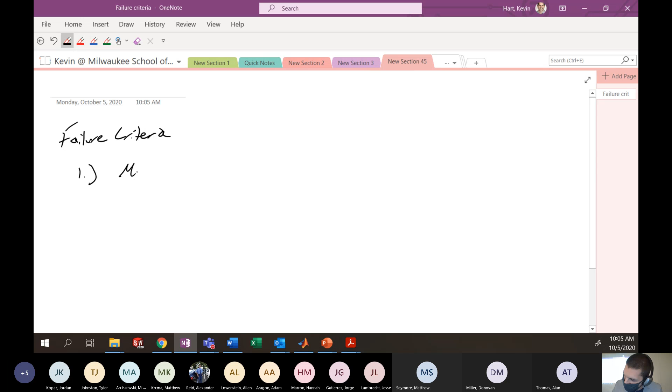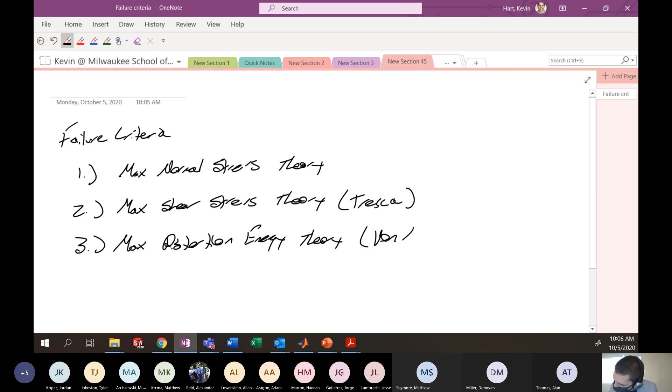The ones that I will test you on are: max normal stress theory, max shear stress theory (which is sometimes called the Tresca), and maximum distortion energy theory (which is sometimes called von Mises failure criteria). These are the big ones you really need to walk away from this class knowing in and out, because you're going to use those in your design of machine components classes.

Numbers 2 and 3 are most important, but also helpful to know number 1. But the interesting thing about all three of these particular theories we've talked about is that they all sort of rely on the fact that the material will fail the same in compression as it does in tension, which is not always the case.

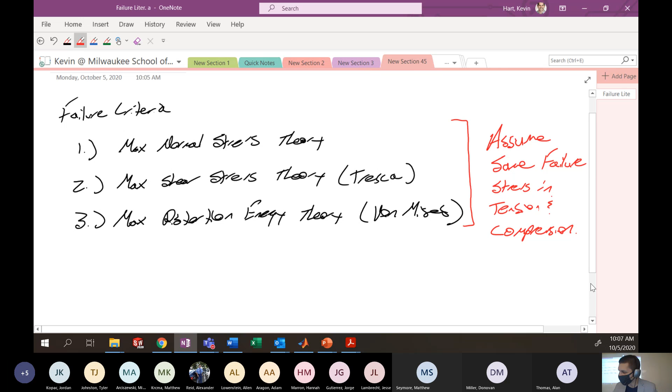So these assume same failure stress in tension and compression, and that's not always the case with real materials. You know this if you've ever worked with concrete - it's amazing in compression, horrible in tension. Horrible, I say.

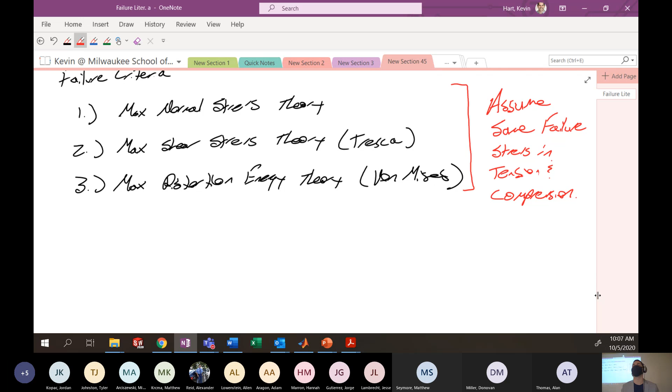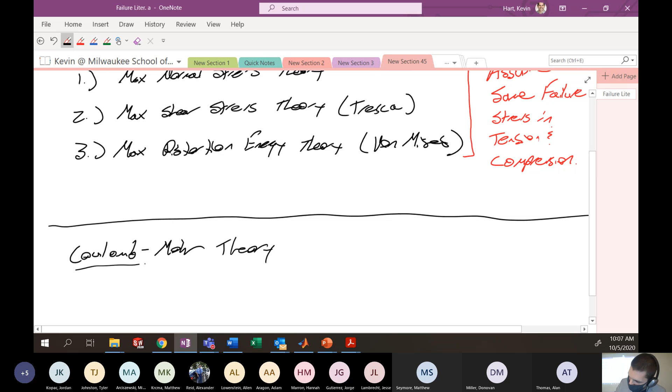I want to touch quickly on what is probably the most commonly used method for evaluating failure stresses of materials that have dissimilar failures in tension and compression. The main theory used to tackle this is called the Coulomb-Mohr theory, and this is generally for brittle materials that don't have the same failure stress in tension and compression.

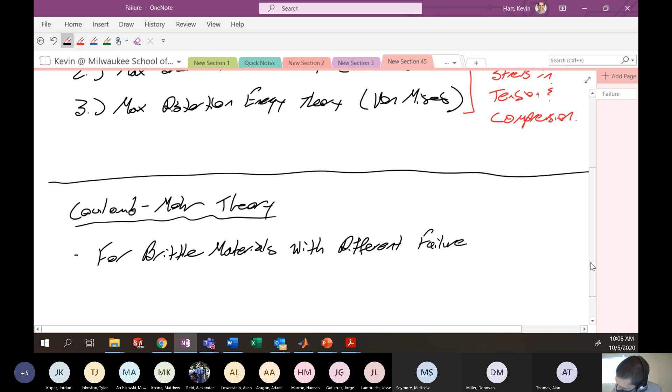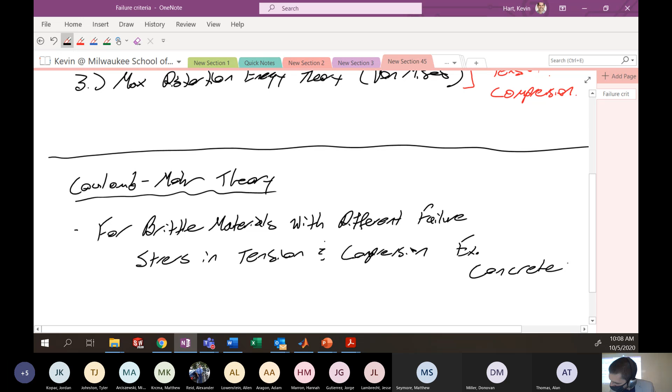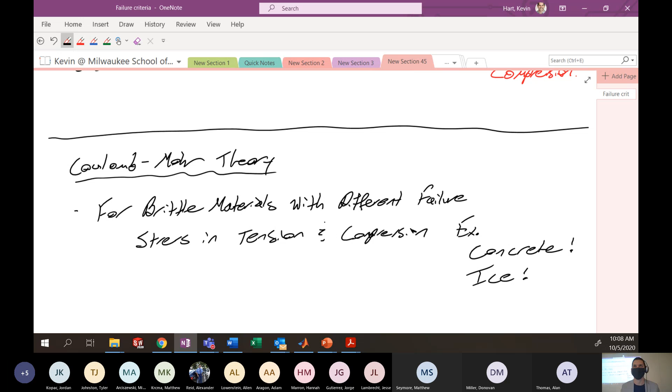One example might be concrete, or ice is another one - strangely. Concrete! Ice! Maybe it's because winter's coming and I'm getting nervous about ice. I don't know.

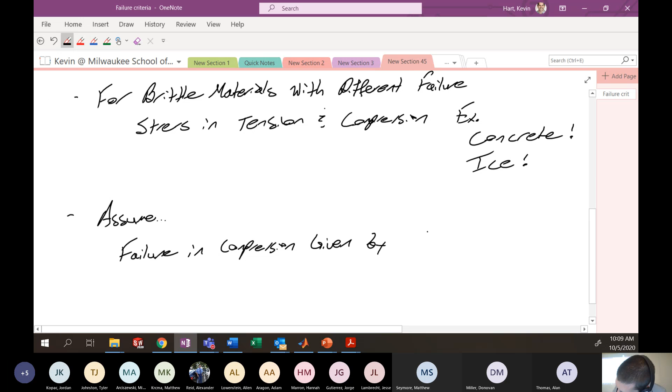All right, so let's assume that failure in compression is given by sigma naught with a superscript c, and failure in tension is given by sigma naught with a superscript little t, as opposed to Mr. T - I pity the fool.

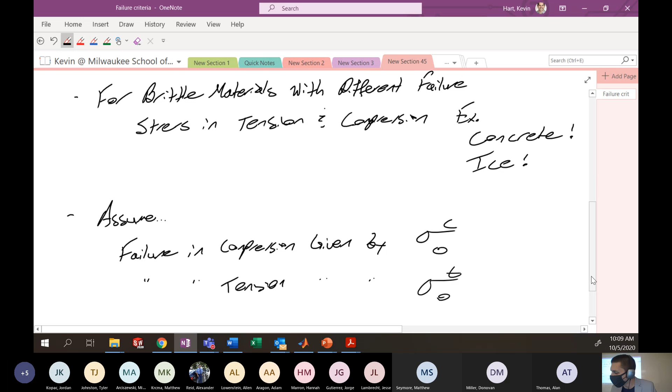All right, here's the failure criteria. It's pretty simple when you think about it. It's maybe a combination of the contribution that your largest principal stress makes towards tension, plus the contribution that your smallest principal stress makes towards compression, both potentially adding up to give you some failure criteria. So here's the equation, and I'll talk through it.

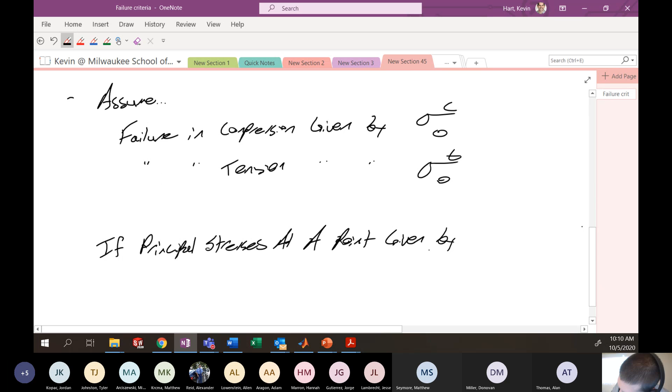We'll say if principal stresses at a point are given by the following: sigma 1 greater than sigma 2 greater than sigma 3. So we're ordering them in the traditional way - 1 is greater than 2 is greater than 3.

Then Coulomb-Mohr is: the first principal stress normalized by the failure of that particular material in tension, minus the third principal stress divided by the failure of that particular material in compression. If this together is greater than or equal to 1, you fail.

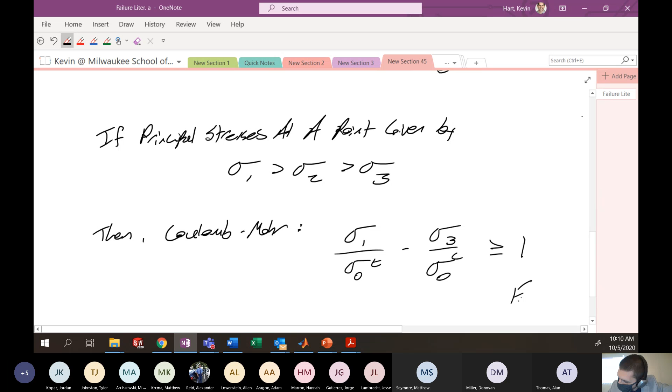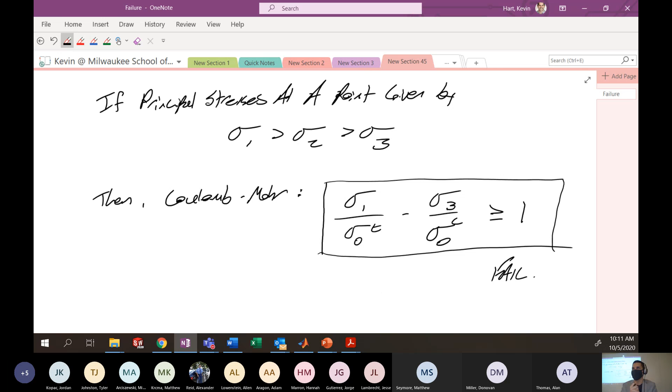Okay, this has flavors of like maximum normal stress theory in sort of a way. Actually, I'll say it's more similar to max shear stress theory.

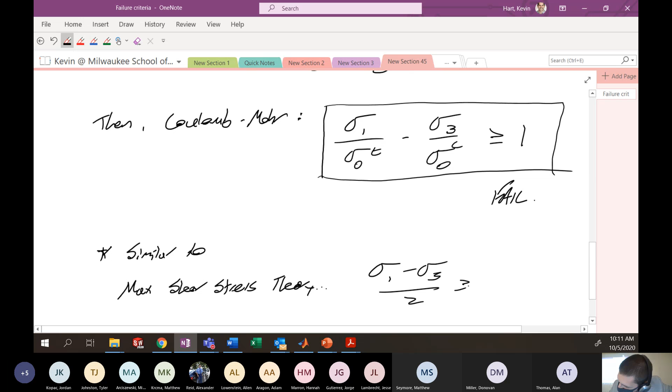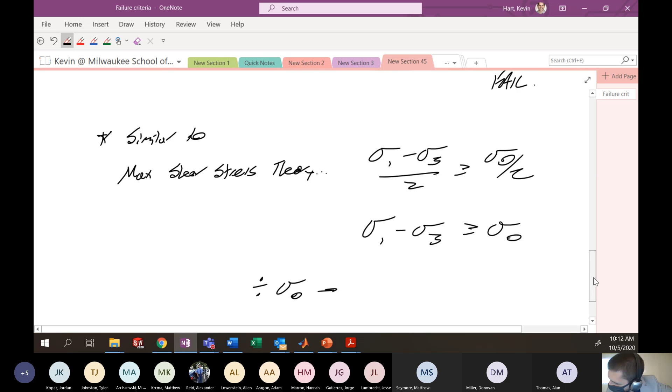Which, if you remember, was sigma 1 minus sigma 3, divided by 2, greater than or equal to sigma naught over 2, you would fail. That's our max shear stress, or if you simplify, sigma 1 minus sigma 3 greater than or equal to sigma naught. This was just our general max shear stress theory. If you rearrange this equation by dividing both sides by sigma naught, you'd end up with sigma 1 minus sigma 3 divided by sigma naught greater than or equal to 1. So think of this as the difference in these principal stresses, normalized by the yielding stress. If that's greater than or equal to 1, you would fail.

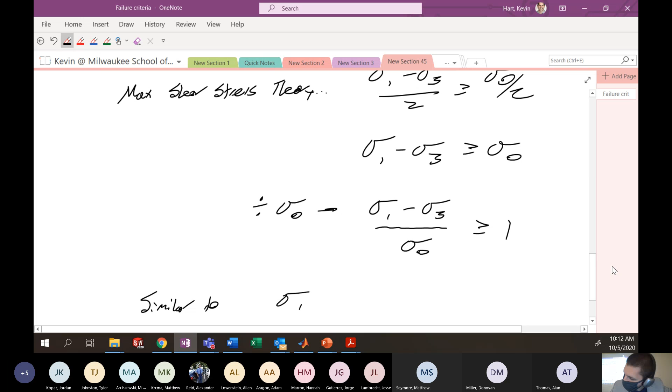So we have flavors of that with our Coulomb theory, except we don't normalize this difference by one value. We normalize each of those individual components by the yield stresses in compression or tension, to see what happens. This is similar to what we just saw: sigma 1 over sigma naught tension, minus sigma 3 divided by sigma naught compression, greater than or equal to 1. It's a very similar concept. If these values were the same, it would simplify to your max shear stress theory. Hopefully we see that.

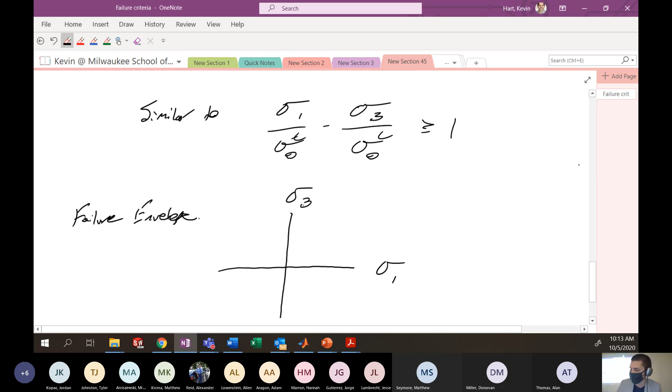Now, how does this actually look in your failure envelope? Well, if we did sigma 1, sigma 3 here instead of sigma 1, sigma 2, which we normally do, you might have a situation. Let me bring this down here.

Here is your maximum that you can handle in tension in both situations. So here's sigma naught T, here's sigma naught T. But in compression, you can handle maybe twice as much, let's just say. So here, negative sigma naught in compression, negative sigma naught in compression. So you would have something that looked like this.

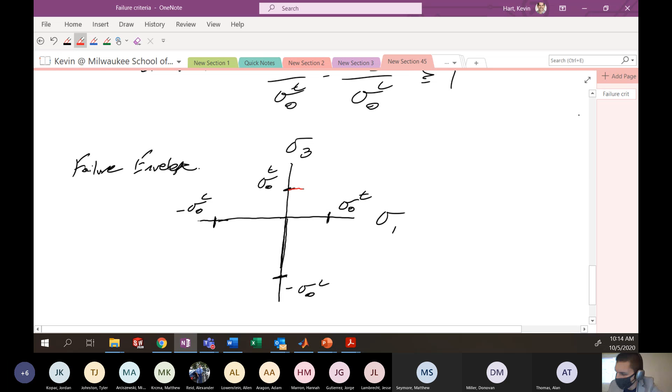Okay, and this is your failure envelope for Coulomb. Oh, that's terrible, gosh, I did not pass kindergarten, I cannot stay in the lines. So even though they gave me a PhD, they held me back because I didn't pass kindergarten. There you go, that's better.

So we can see here generally that if the amount of stress this material can hold in compression is higher than the amount it can hold in tension, we have a much bigger failure envelope in a fully compressive state than in a fully tensile state. When you think about concrete applications, this is usually the case, and in areas where you need additional tensile support for concrete, they use rebar. That's all I'm going to say about the Coulomb theory. I'm not going to test you on it, and I'm not going to have homework problems on it. I just want you to be aware of this failure theory that might apply if you have materials with dissimilar failures in tension and compression.

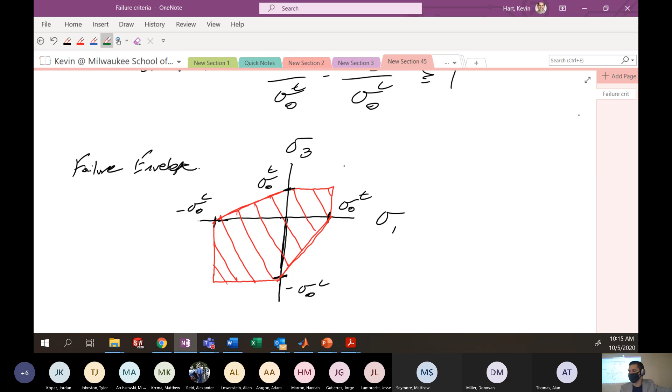So that'll conclude the failure stress notes, and we'll now move on to the next topic, which is buckling.

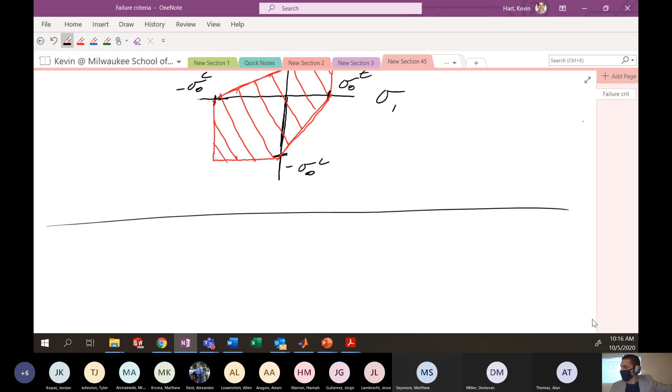And I'll survey the room since people are in front of me here. How many days did you talk about buckling in 2004? You can show me on your hand. One to two, I'm getting the scissors over here. Do we have zero? Two? All right, so at least you guys have seen it a little bit. Okay, good, well that's nice. I've had some 3005 classes where it's been zero, we did not talk about it, and that just makes me a little scared. But okay, it is what it is.

So new topic, buckling. And I think this is my favorite topic for the course, personally. I think it's really quite interesting, and if people don't consider buckling for failure, then you're going to be a bad engineer. Long, slender columns under load can fail prematurely before you might predict with the failure theories we just talked about, and that's because of this instability in long, slender columns.

And I brought this ruler here because it's the most classic example. You've seen this before, you got this ruler, and if you load it on the ends, it will buckle. This material itself does not fail, it's not yielded, it's not fractured, it's not broken in any way. It's just buckling, and this is just an instability in materials that exist in the world. It's just part of the physical world that we live in.

And so if you're not considering buckling in a potential situation where it could occur, like if you have long, slender columns that are holding up a building, for instance, and you've got a column that looks something like that holding it up, if you're not considering it, your building's going to be a little wobbly, I'd say. So not so good. So we need to consider this.

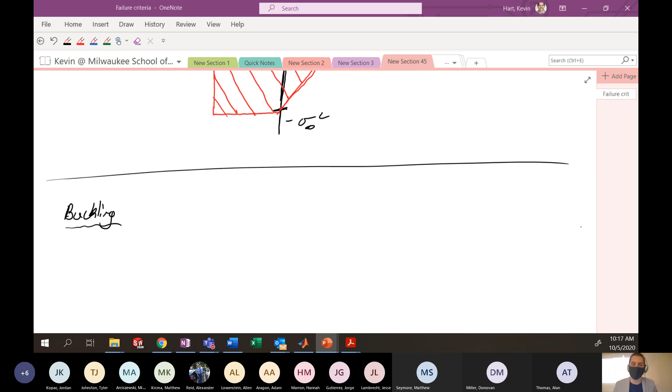So let me just write some things here as motivation. Long slender columns, under axial loading, can buckle in an unstable manner.

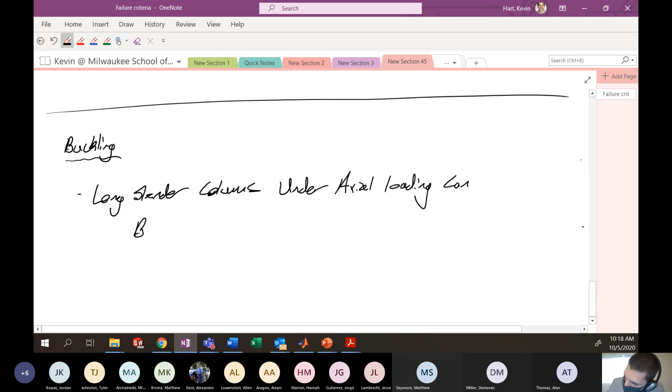The example I just used was like a long slender ruler. These can sometimes occur at loads that are significantly lower than that which might cause yield or otherwise cause the material to fail.

Let's say that would normally cause failure by yielding. Let's just stick to yield metals for now. Again, the ruler is an example. It can sometimes be way less - we're talking 5% of what you might predict with maximum normal stress theory or something like that. Way less.

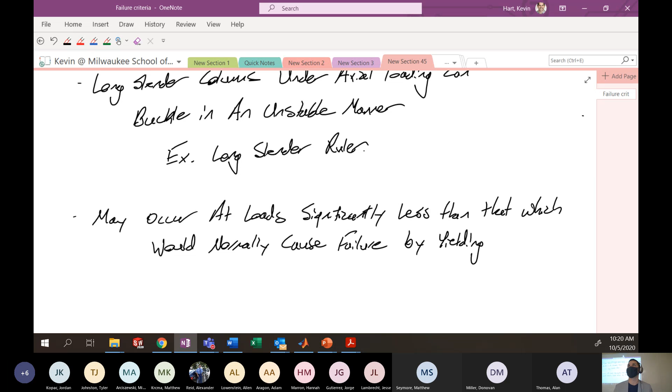You probably saw this in your 2004 class as the following equation, and I'm going to review that quickly.

Did we all see this, or something along these lines, in 2004? Pi squared EI over L prime squared, or L effective squared, or something along those lines? I'm seeing some head nods and some deer in the headlights - okay, so maybe 50-50.

So what we're going to do is actually go over how this equation came to be. Maybe you derived it in 2004, maybe you didn't. We're going to talk about it in pretty gory detail here because the derivation becomes important.

It becomes important to know because this particular equation is for centrally loaded columns. What I mean by that is a load directly in the center of the axis of the beam. You could have a situation where your load is somewhat off axis, and we have to be able to know how to deal with that by modifying the equation you see here.

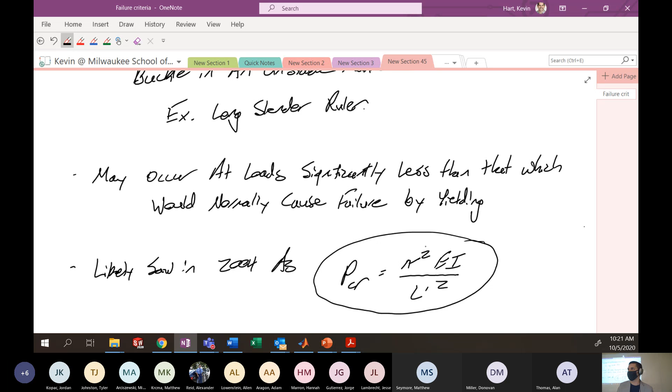To do that, we really have to go through the full derivation so you understand where this comes from, and how we might modify it if you have some load that contributes bending as well as axial loading to that cross section. So let's do that quickly.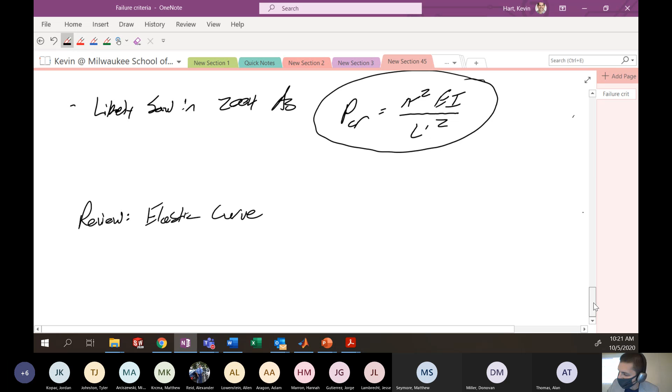The first thing I want to talk about is the elastic curve. In the elastic curve, there's a variety of definitions, but it's typically a function that represents the neutral axis of some bar.

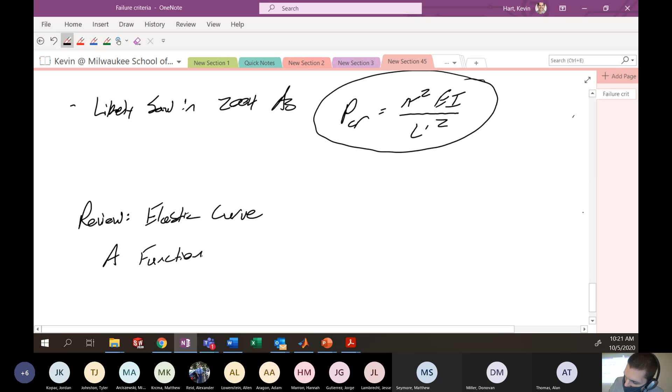Question? Is that pi squared in the equation? Yes, Alan, it's a pi squared. Pi squared EI over L prime squared.

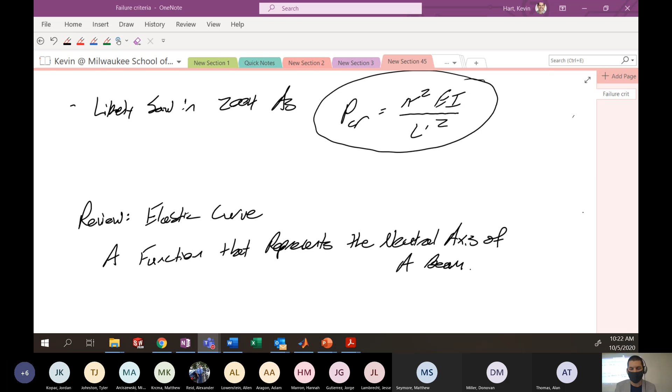I will continue. The idea you want to have in your head, which you've probably seen before, is if you have some beam and it's being deflected - I'll do the best I can to draw some beam that's being bent. Something like this. Here's your beam. You've got some pin over here, some roller over here, and this is being subject to some force in the middle, F.

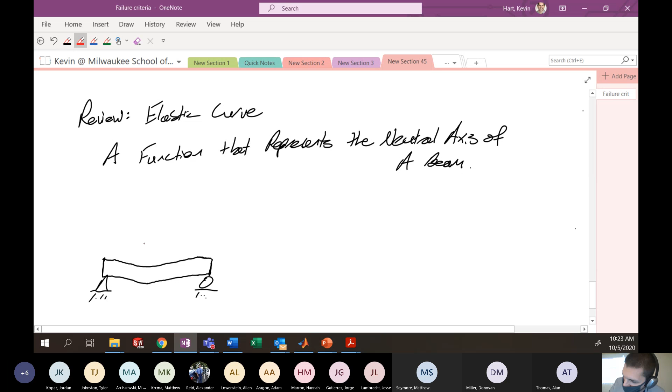You might represent this bar using just a general function, which we call the elastic curve. You could put a coordinate system on this, maybe emanating from the left-hand side. Call this the X coordinate system. This is typically like Y, or what you might see as V of X, when you're talking about the deflection, or the function that is the cross-section in the neutral axis of this beam.

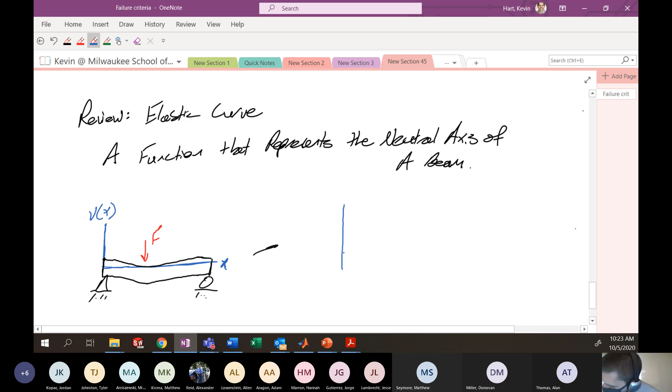Then you might see this represented with this elastic curve idea as, okay, here's my support, my pin and my roller. I might represent this just using a simple line that looks something like this. This is meant to represent the neutral axis of this particular bar - that's the idea of the elastic curve. We typically say this has a function: if this is x, the length along the axis of the beam, then we would call this v of x, or the deflection of the neutral axis of the beam.

Deflection is the term.

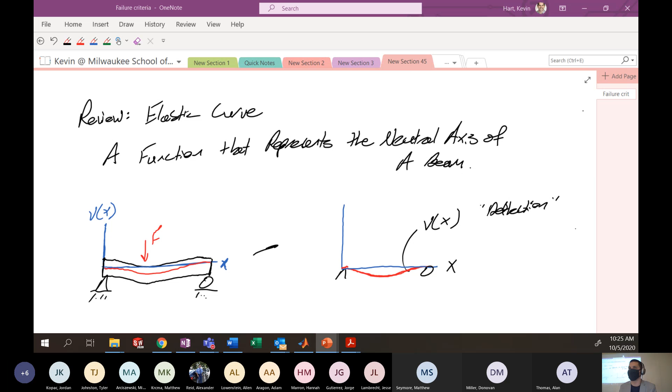Writing the elastic curve allows you to do a lot of interesting things, like look at what is the derivative of this function, what is the second derivative of that function, and so on, and how those particular derivatives might be related to the bending moment in the cross-section at any location, or the transverse load in the cross-section at any particular location. So the point is this elastic curve allows us to learn a lot about the particular cross-section and how it's related to the internal moments. Hopefully you went through all of that in 2004. I don't have a ton of time to do it right now, but this allows us some very useful relationships.

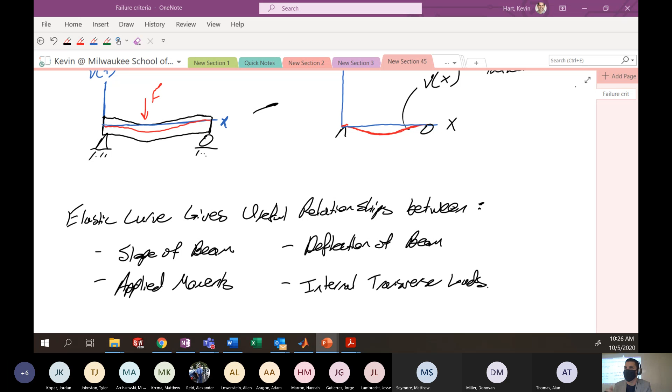Relationships between the slope of the beam, applied moments, deflection of beam, and internal transverse loads. Those relationships, which I hope you've sort of seen before, all stem from what is known as the moment curvature equation, or the governing differential equation for a beam in bending. We talk about this in words, but in math language, which we're all kind of familiar with, this is what we call the governing differential equation of beam bending. So it's a simplified version.

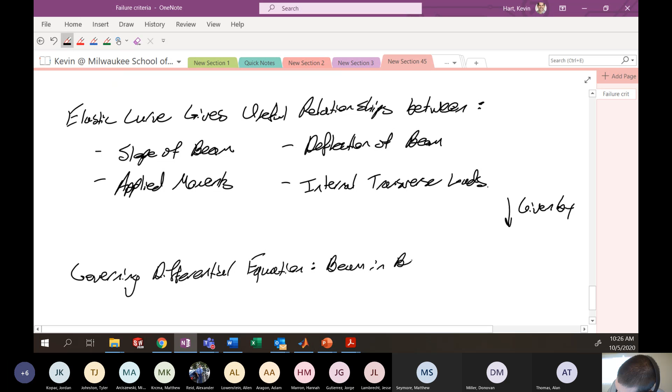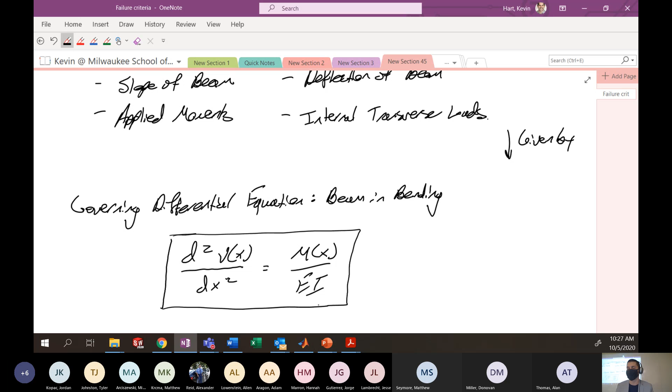And boy, I hope you guys have seen this before: D squared Vx dx squared equals Mx over EI. If this is not familiar to you, in the lecture notes, slides 2 through 5 of the buckling section, there's a full derivation of this particular equation. Hopefully this is not the first time you've seen this. You can play with this and take derivatives and integrals and look at various things.

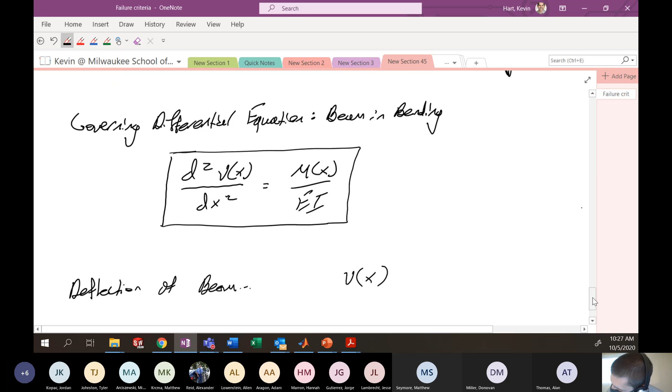We'll say that the deflection of the beam is given by this function v of x. The first derivative gives you the slope, sometimes called theta x. The second derivative gives you this moment relationship: EI times d squared Vx dx squared is equal to the moment, the internal moment inside of the beam.

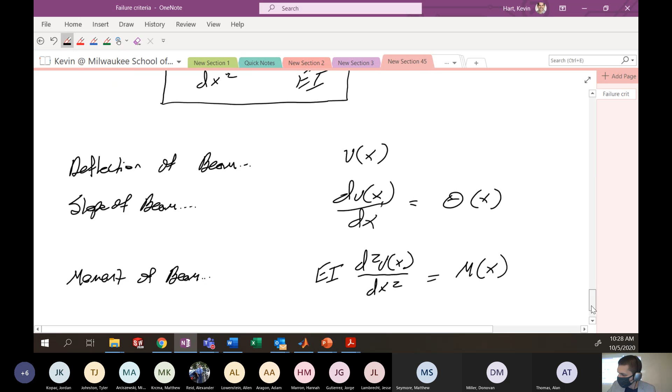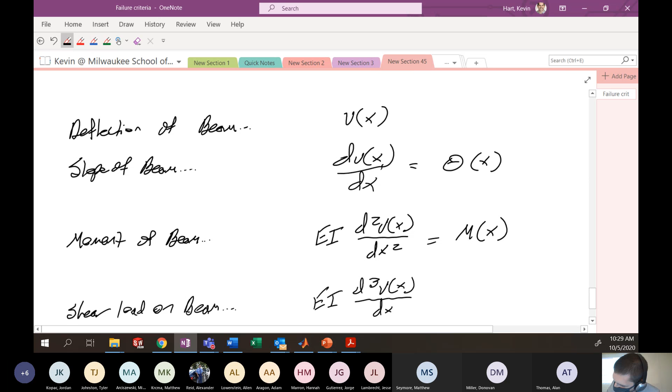Another derivative will give you the shear load on the beam. That is EI d cubed Vx dx cubed equals capital Vx. Are we all having nightmares? This is a capital V, this is a lowercase v. And then finally, just the load on the beam, the fourth derivative, sometimes called F. So this is marching our way through all the derivatives of that elastic curve given by V of x.

How are we doing? Can I get some nods in the classroom? You've sort of seen this before, or you haven't seen this at all before. Okay, get some nods. Okay, all right, good.

Hey, Dr. Hart. Yes, sir. Should the shear load on beam, the EI d cubed, should that be dx to the third on the bottom? Yes, thank you. There should be a cube here on the bottom, dx cubed.

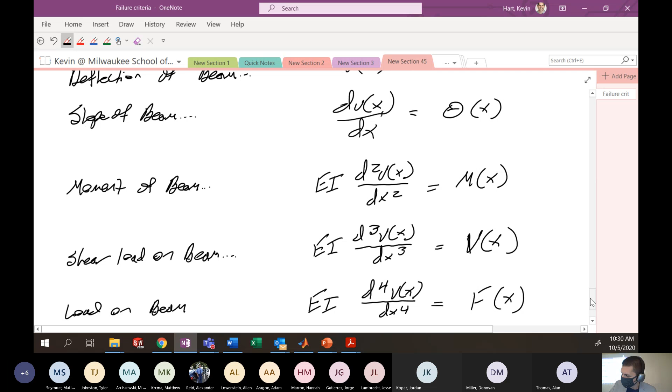Okay, so all these relationships hopefully you've seen before and have worked with before. We're going to utilize these in part to come up with that critical buckling load formula. So let's do that now. I want to first do this by drawing a picture. Here we're going to derive critical buckling load.

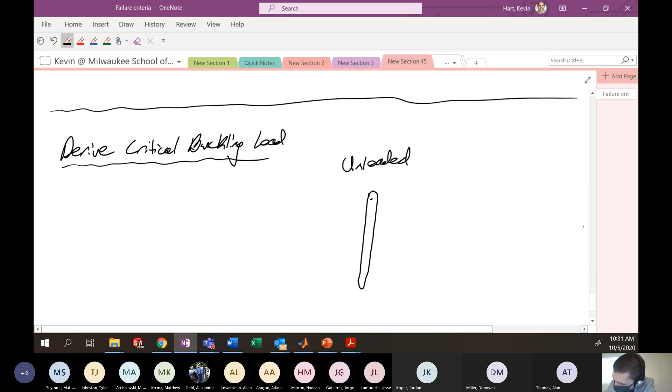I'm going to motivate this with a picture. The beam that we have here is similar to the beams you saw before, except we're doing this vertically instead of horizontally. Consider an unloaded beam, so it just looks like this. And we've got a pin-pin configuration, let's just go with that for now.

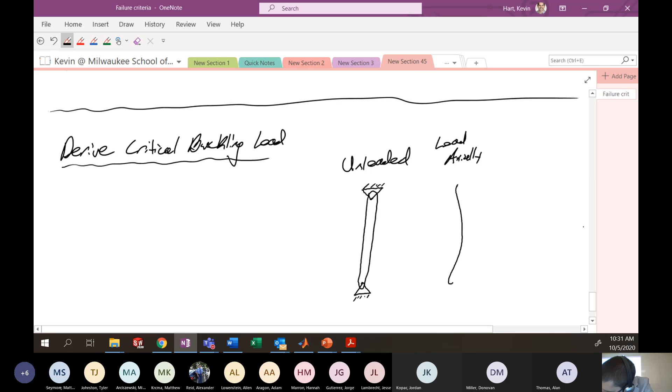Now we're going to load this axially. So you should see here now something that looks a bit like this, where we're providing some load on this guy. I don't have a ton of room to draw this, but here we have some load, let's call it capital P.

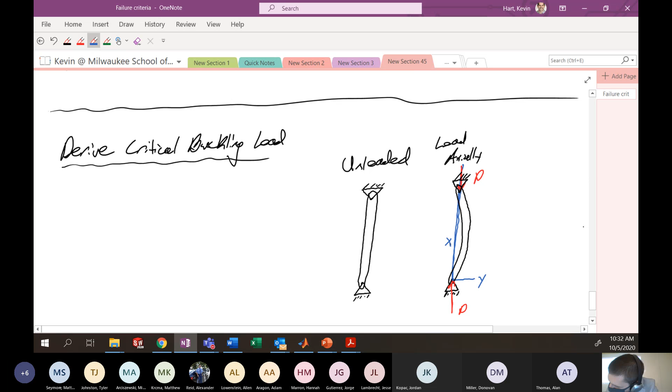I'm going to put a coordinate system on this so we can do some analysis. That coordinate system will be starting here on the bottom, top. Here's my coordinate system, always along the length of the axis. This is the x direction, so then this might be the y direction, and here is x direction. All right, so this is the coordinate system. It's sort of a left-handed coordinate system, but let's not worry about that for now.

The elastic curve on this bar is like the neutral axis. We're going to start at this bottom pin, move to this upper pin, and this green line is your elastic curve, given by v of x. It's just a singular line of function.

What we're going to do is make an arbitrary cut in the bar at some location x, then do a force balance on that cross section. Let's cut the bar. Here's your pin again down here, and the elastic curve, I'm only going to draw the elastic curve, looks simply like this. We've got our cut there at that particular location.

At the bottom, we still have this force down here that's P. To balance out appropriately for equilibrium, we have a force balancing here, P, that is equivalent. And then we have some moment that we've generated by relocating this applied force, here is this moment M, in this particular cross section.

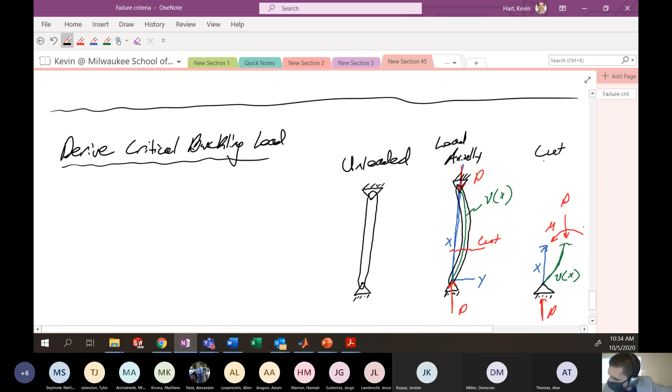And we're going to say that this is at a location of x. Remember that this is our function v of x. All right, we're ready, the picture has been made. This is our cut at x.

So now we're going to sum the moments, and let's set the sum of the moments here equal to 0. That's simply going to be that this moment in the cross section, M at location x, plus P times the distance x, equals 0. So maybe we're summing the moments about, I don't know, here, point O.

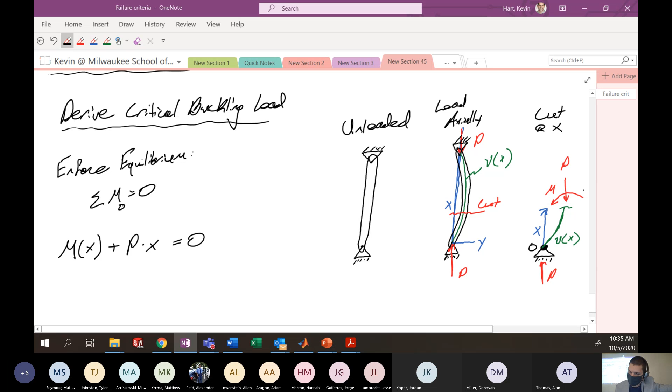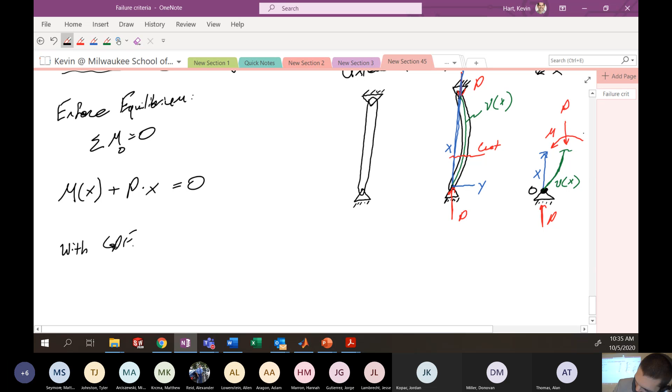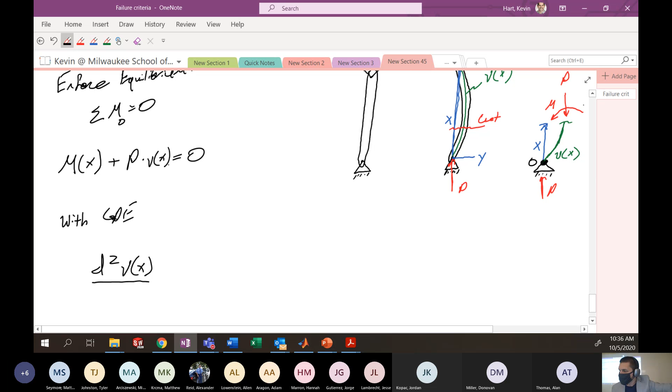So with our governing differential equation, we have d squared v of x... sorry, this is not x, this v(x) is our length, up here. Dx squared is equal to M(x) over EI. There's our governing differential equation.

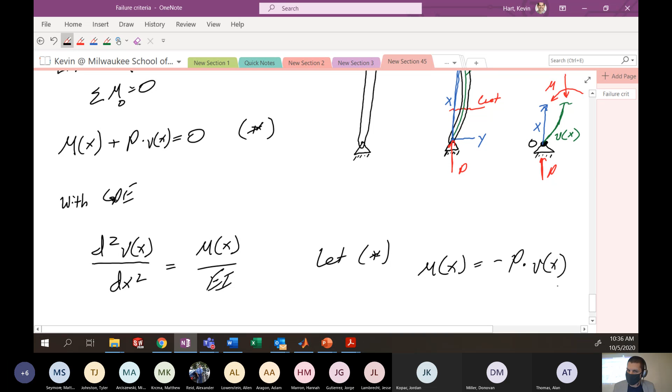We rearrange that equation, starred, as M(x) is negative P times v(x), our moment arm. Then we have the following. Let's rearrange into standard form.

I'm going to make one more substitution here. We'll let... this will make sense in a second. Omega, the Greek letter omega, equal square root of P over EI. This will make sense in a second, just hold it with me. Then our governing differential equation is d squared v dx squared plus omega squared v(x) equals 0.

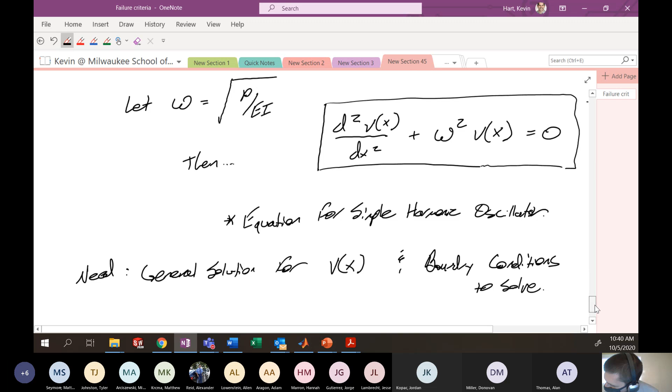You may or may not remember the general solution for a differential equation that looks like this, but most of the time, if you have a differential equation with the function and a second derivative, you want to think of sine and cosine functions. Because the second derivative of sine is also sine, and the second derivative of cosine is also cosine, just with signs flipped. So the general solution here is...

v of x is equal to a sine omega x plus b cosine omega x. You put that function into that differential equation, it will always be true.

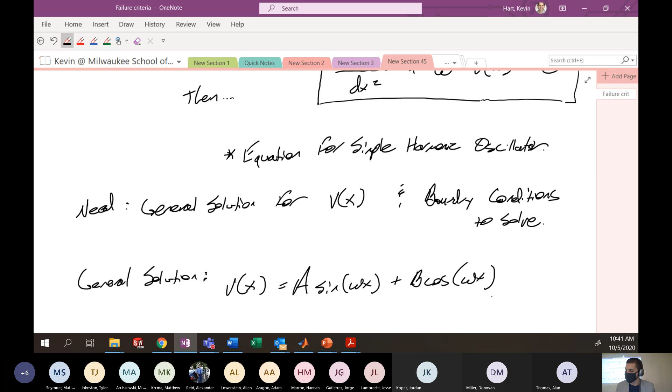So make a note here: the second derivative of this is something like negative a omega squared sine omega x minus b omega squared cosine omega x. If you punched all this stuff back into that original differential equation, you would see that it would equal 0, in fact regardless of the terms a and b.

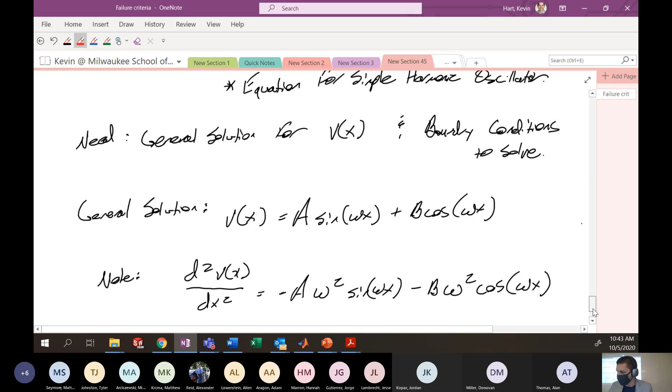For instance, if you put this guy in here, and this guy in here, you would get the answer of 0 regardless of the variable. That's the idea of the general solution for differential equations. So once we have our general solution, we need to figure out these capital A and capital B, and that is boundary conditions. Now, if we think about what's going on with our particular beam, we can draw this.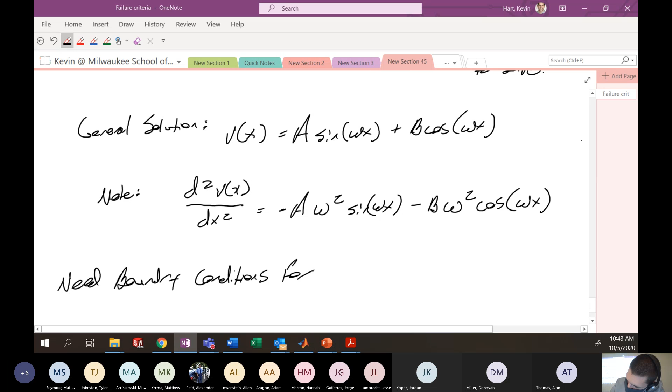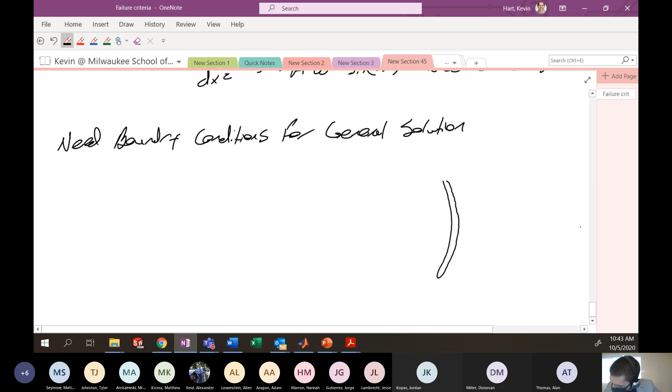Okay, again here's our beam. It's sort of being deflected. Our coordinate system here is x and y, and let's say this guy originally has some length of L.

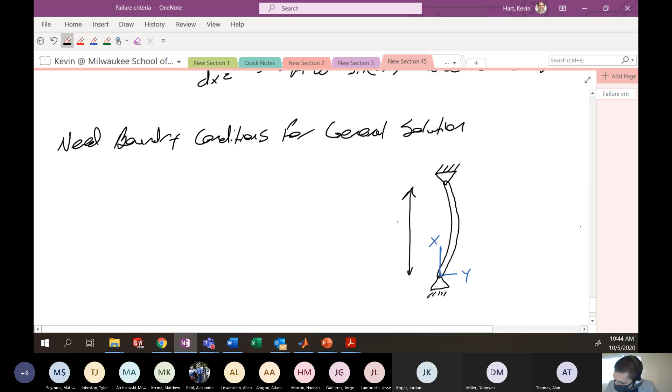There's a couple boundary conditions that are straight away pretty obvious. One is that the deflection at x equals 0 is 0. So here's our v of x. First boundary condition would be that the deflection at x equals 0 is equal to 0. That's because we're pinned there, it can't possibly move in the y direction. So that might be one initial boundary condition.

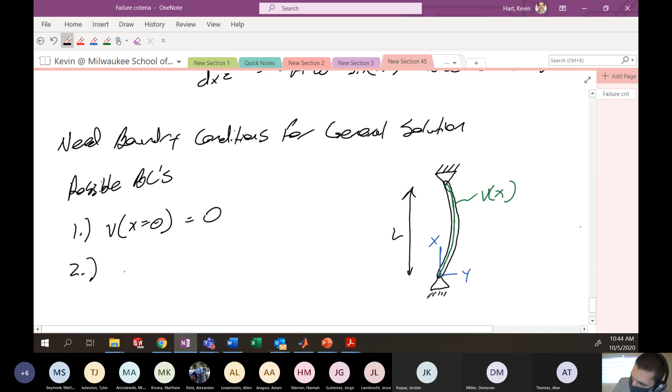Another boundary condition you might have is the same thing at x equal L, which is the top of this beam. There's no deflection at the top of the beam in the y direction. No deflection at pins. You can see that this function is equal to 0 at the top and the bottom of this system.

Another thing that's a little more subtle is that the second derivative, or the moment, at x equals 0 is also 0. And the moment at x equals L is also equal to 0. That's because we have no moment arm length. Vx equal to 0 means that the moment arm at that particular location is 0. This is also like the second derivative.

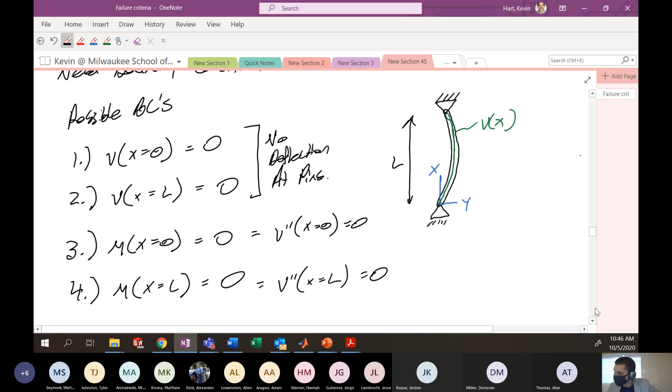Oh, I'm out of space here. Let's do the v double prime. V double prime x equals 0 equals 0, and also v double prime x equal L, 0. Same thing. So we know the second derivative of this elastic curve is the moment. So these are possible boundary conditions that we could use.

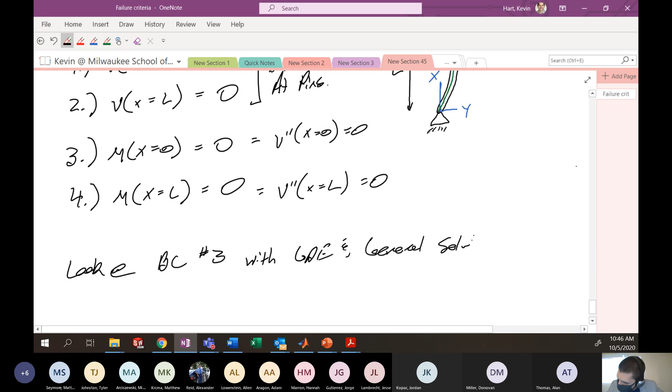All right, well let's dive in on this. Let's look at boundary condition number 3 with the governing differential equation and general solution. We know that our general solution looks something like a sine omega x plus b cosine omega x.

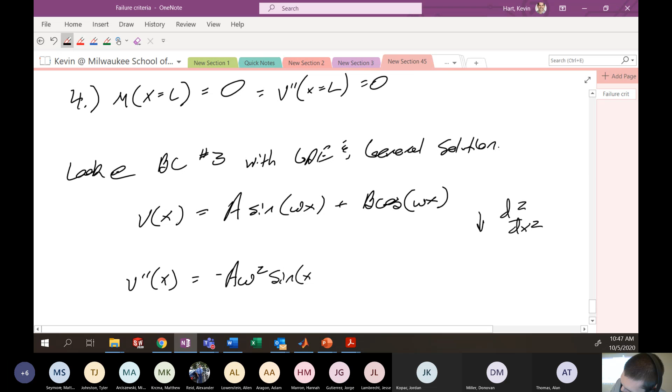Second derivative, let's label it as v double prime of x: negative a omega squared sine omega x minus b omega squared cosine omega x. We already sort of wrote this.

Now let's use boundary condition number 3 that says v double prime at x equals 0 is equal to 0. Let's plug that in. The left-hand side, 0 equals negative a omega squared sine of omega times 0, which is sine 0, minus b omega squared cosine 0. This is one of the bits of information, the boundary conditions, that we can utilize to solve for what is this coefficient a and what is this coefficient b.

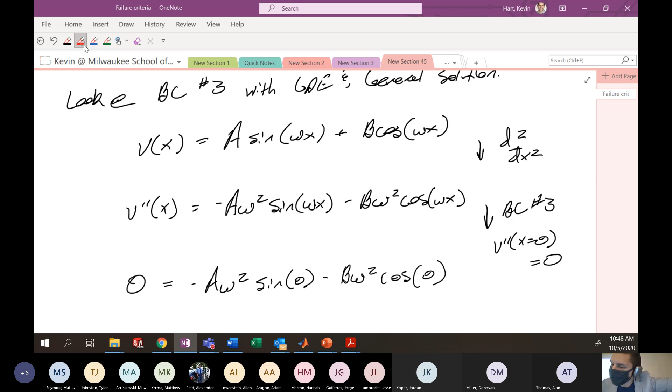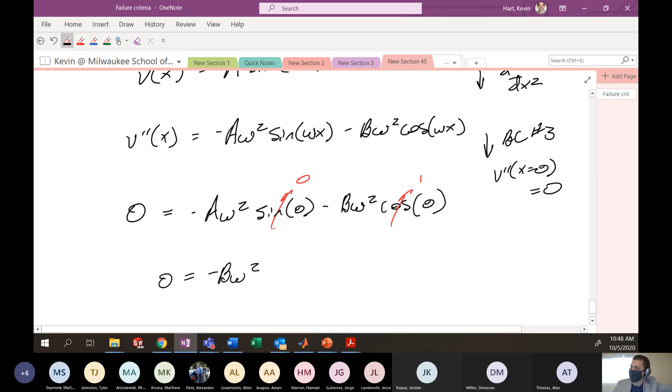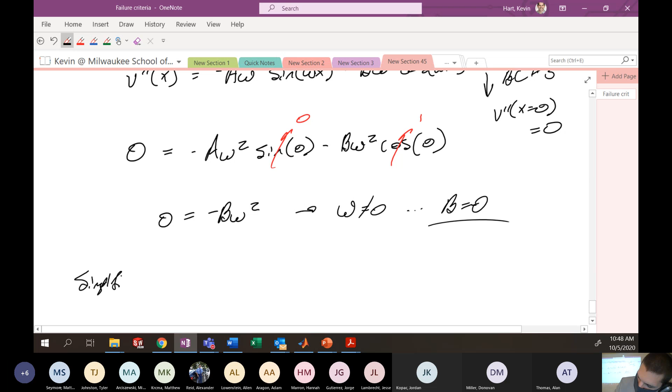Well, we see sine 0 is obviously 0, and cosine 0 is 1. So we're left generally with 0 equals negative b omega squared. And we know omega is not equal to 0, so b has to be equal to 0. So this simplifies the general solution to Vx equals a sine omega x. Okay, that's where I'll call it today, and we'll figure out the last boundary condition when we come back on Wednesday.